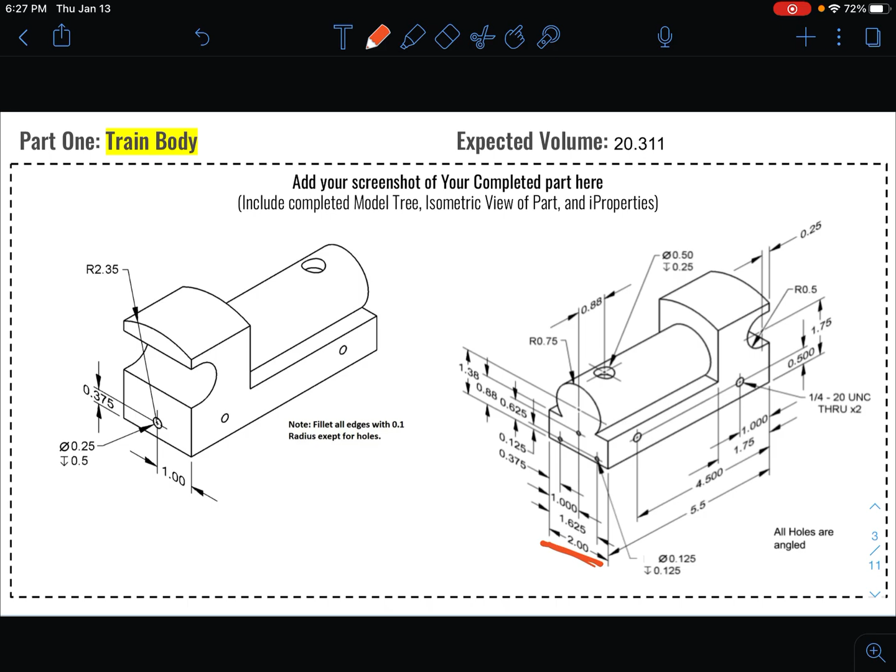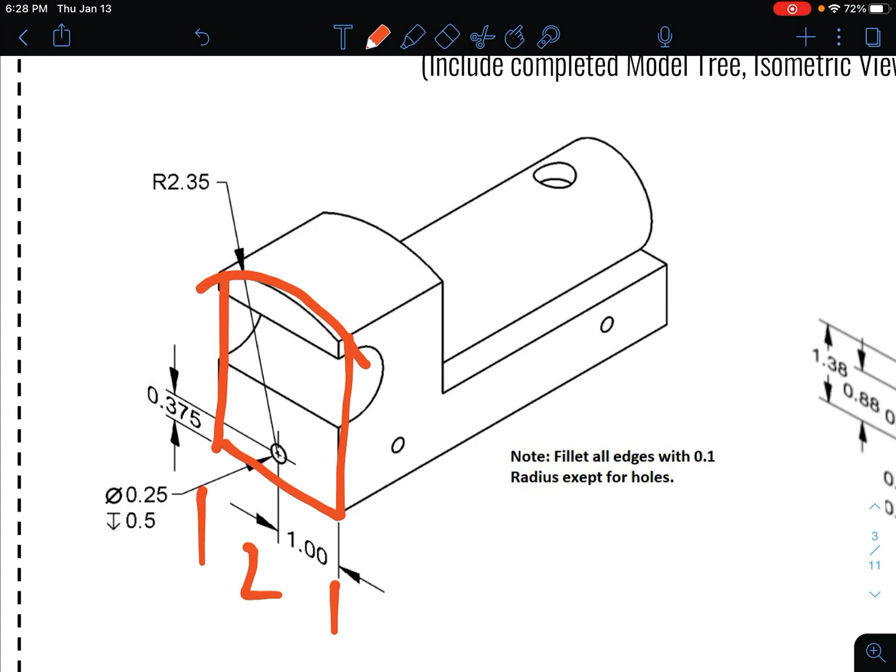So what we're going to be doing is start by modeling the back side of this train. Really what that looks like, we have a rectangle and one of the edges is this rounded radius. Now we don't know the height of the rectangle, so we're going to draw a generic rectangle with our width of 2, which I found over here. Then we'll place a circle with this radius at this point because we have those dimensions. It'll make a little more sense as we get started.

This is going to be our first video inside of Onshape. So we are going to open up OnShape and I'm going to hit the plus button to create a new document. This document I'm going to call train underscore body, and hit OK.

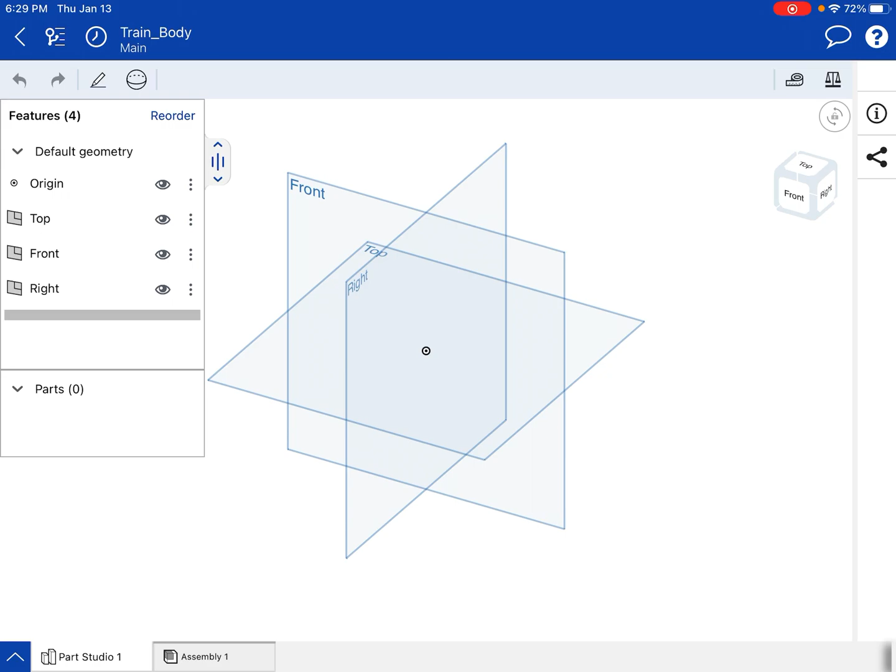Working in OnShape is very similar to Inventor. One, we draw sketches and then extrude those into 3D parts. To get started with a sketch, we're going to hit the little pencil icon in the top left, and then it's going to ask us to select a plane. We're going to start with this front plane over here.

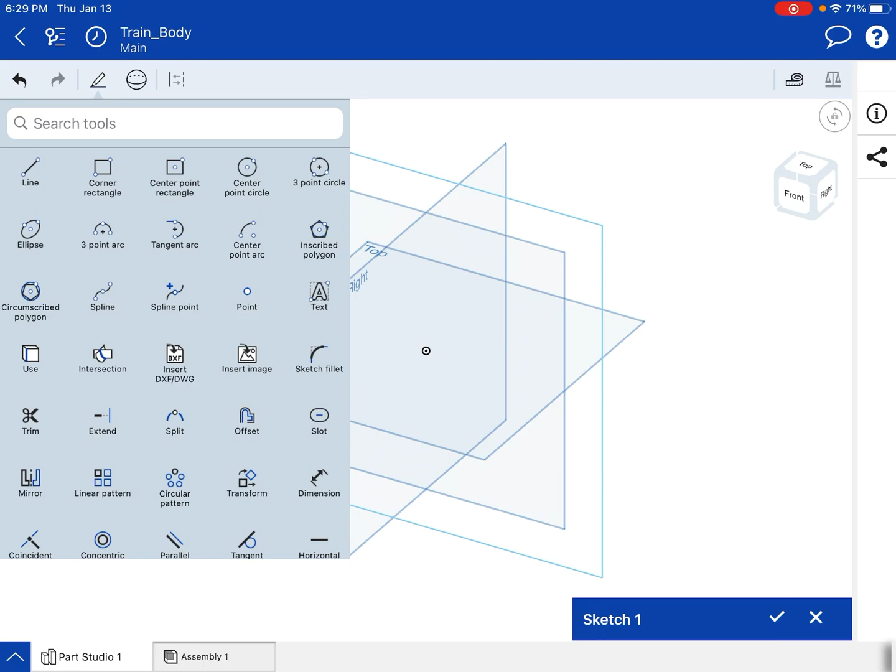One of the things that OnShape doesn't do that Inventor does is automatically shift our plane so we can see what we're working on. It's a little inconvenience, but it's easily fixed. All we have to do is a 2-finger tap on our screen and hit this bottom option, View Normal to Sketch Plane. Now we are viewing it in a normal view.

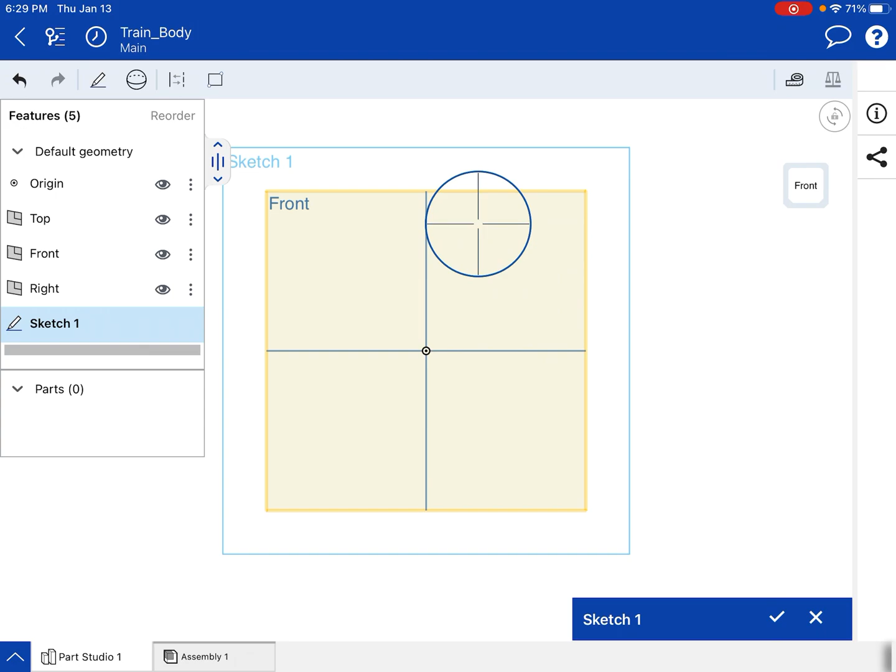Now I'm going to go over to my sketching tools. These are all my tools that I can use. I'm going to choose the corner rectangle, press and hold on my screen until I can hit the origin and then drag out the second point. I don't think I have my actual rectangle tool on. There we go. I'm going to just click and drag out a rectangle that looks something like that. You can see the black lines are fully constrained, the blue lines are not constrained.

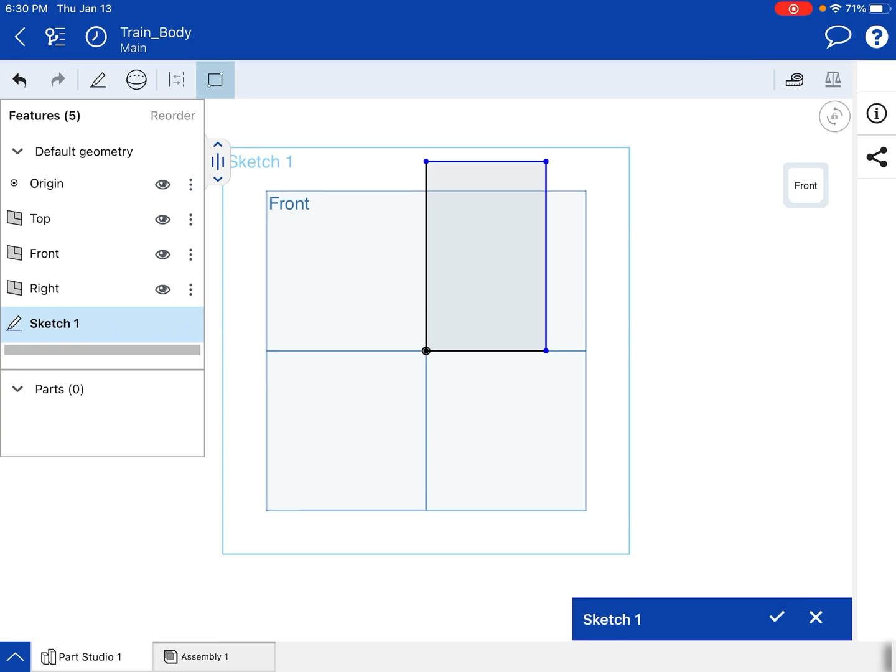Now let's go into our sketching tools again and choose our circle with a center point. I'm going to place the center in the middle of my rectangle, and place the outside edge, pressing and holding down to get a circle right around there. Doesn't have to be perfect because we're going to start throwing in some dimensions now. That's all that we needed to do.

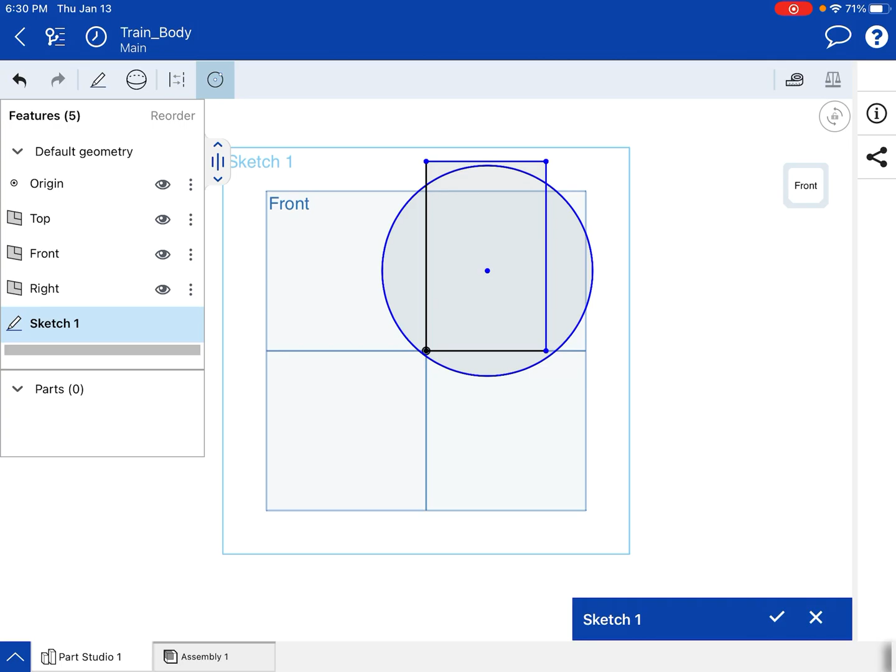The first thing we're going to do is dimension the width of our rectangle. So we have to scroll all the way down and look for dimension on the side. Choose dimension, let's throw in the width. We're going to select both of those, then tap once on our screen, press 2, and hit the check mark. Now we want to dimension our circle.

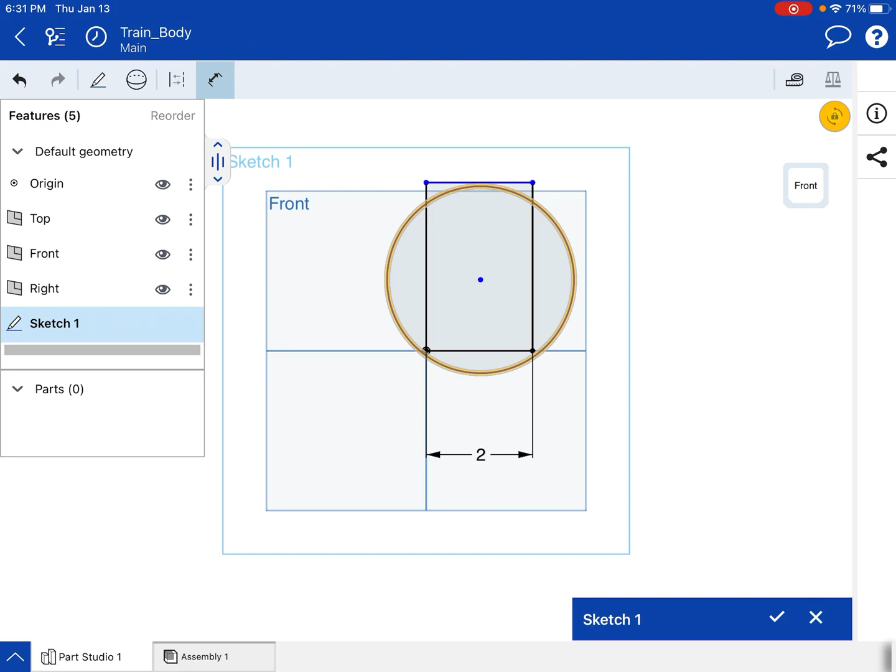Remember, circles always have 3 dimensions. We have our total diameter, which this one is, 2.35 in radius or 4.7 in diameter.

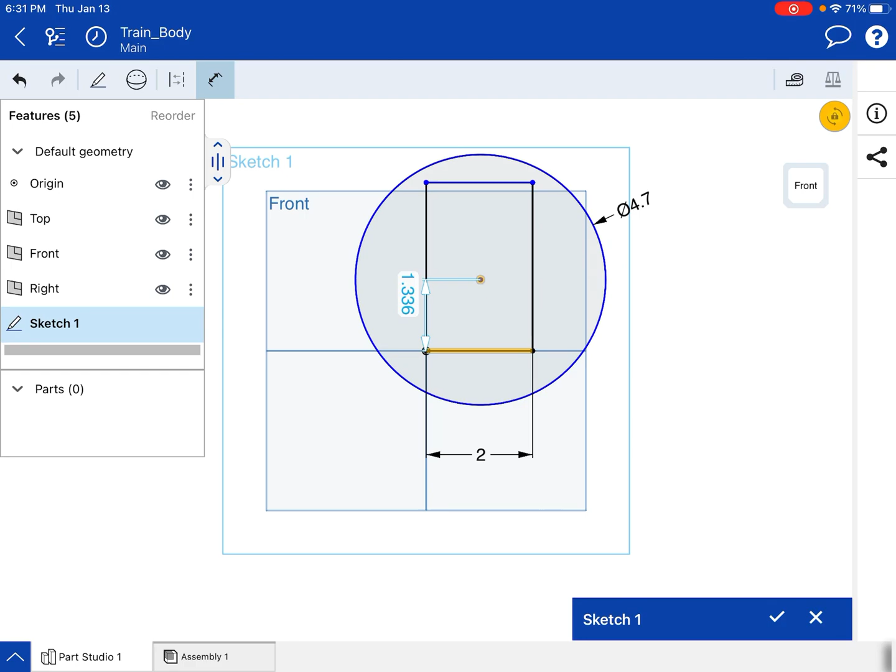Then what we're going to do is place this circle where it needs to go. So from our bottom edge of our rectangle to the center of the circle, that is a distance of 0.375. Then from the center of the circle to an outside edge, we want this directly centered, so we're going to put it at a distance of 1. We now have our basic shape.

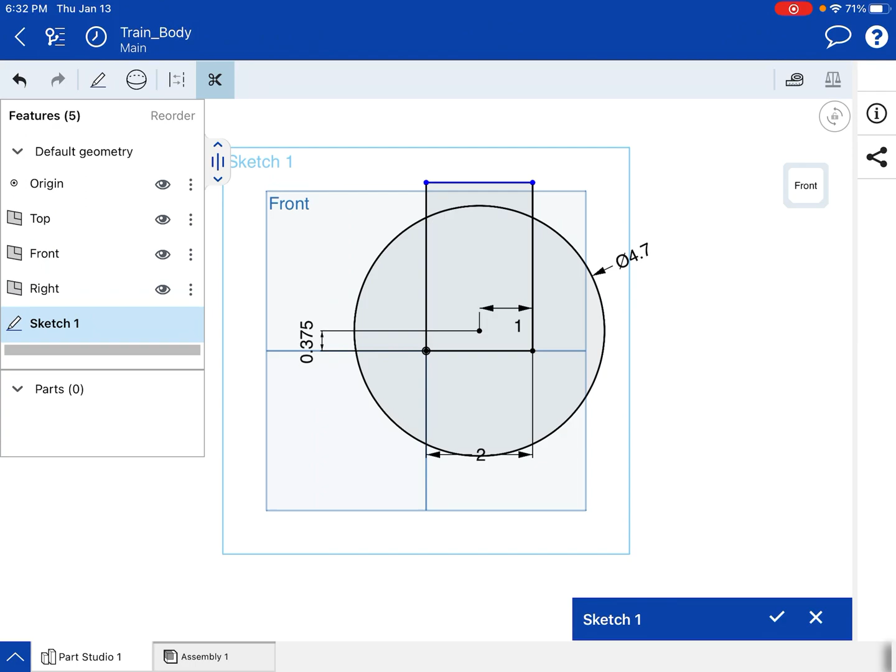The only thing that's left to do is go and trim everything. So we go back into our sketching tools, find the trim command, select that, and just tap on the lines that we do not want, and those will be removed. Now it does get rid of some of our dimensions and we lose some constraints. We can go back and throw in those dimensions if we really want, but for the sake of time, I'm going to keep on going.

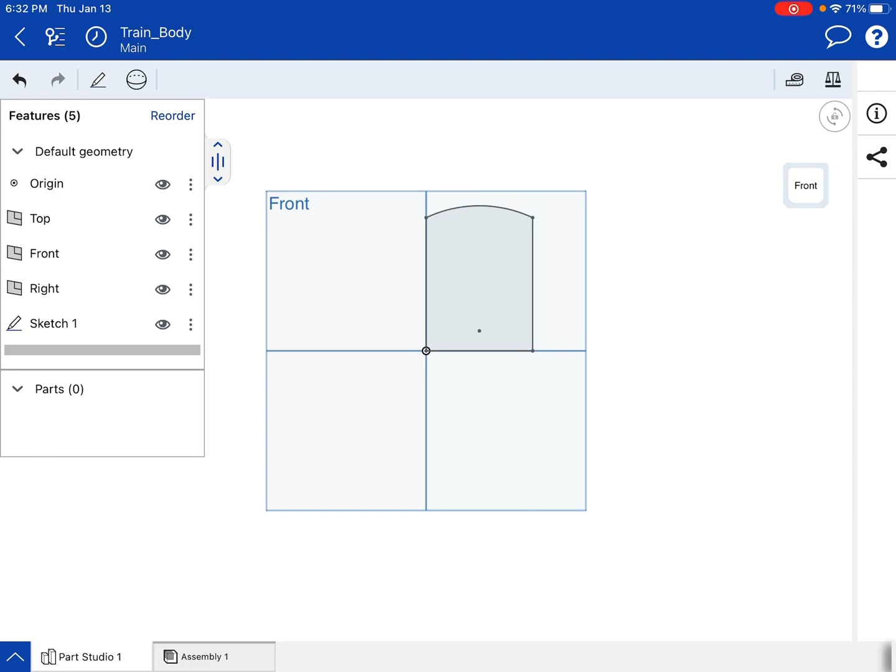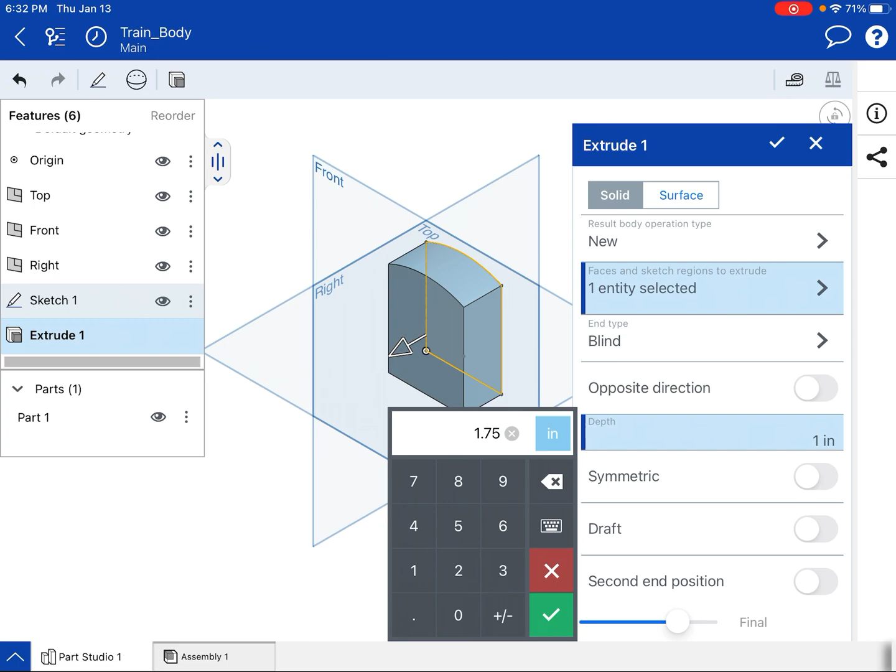I'm going to hit the check at the bottom of my page saying that I'm done with the sketch. I'm going to 2-finger touch so I can view isometric. Then I'm going to go to that sphere icon, click on that, and this all has my 3D commands. I'm going to choose extrude, and select the face that I want to extrude. Now the depth that we're extruding this is 1.75. I'm going to hit the check and hit the check up top.

And now we've got the first element of our body created. To save some room on my screen, I'm going to get rid of my top, front, and right side plane visibility. I did that over on the side—you can see the little eye icons.

I'm hitting those so that they disappear, so I don't want any of those on. I'm just going to be using this as a reference as I go model.

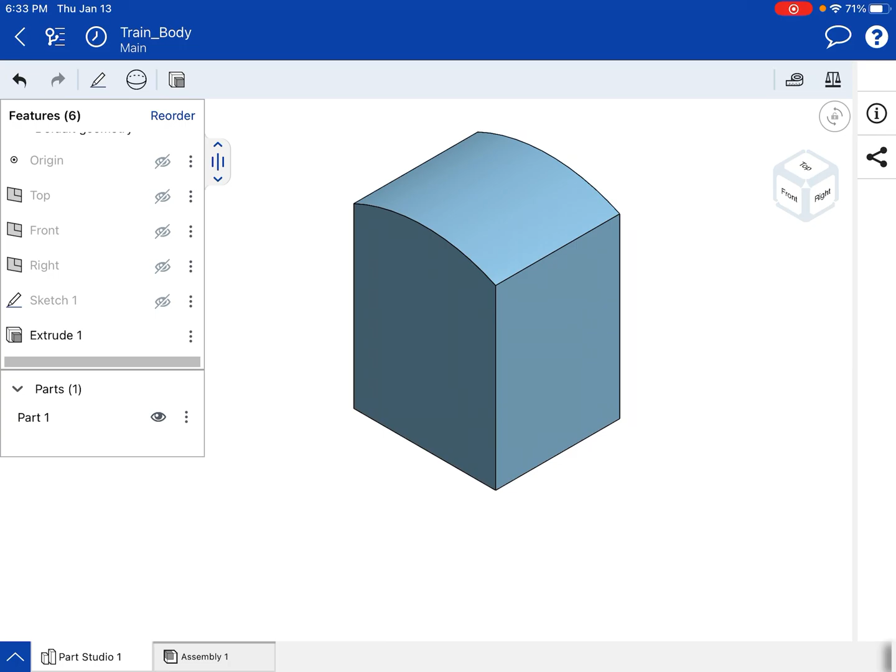So now the next thing we are going to do is model the front face of this train. We are going to draw a rectangle with a circle that cuts in between it, and extrude it out of the part that we just created. Let's go ahead and do that.

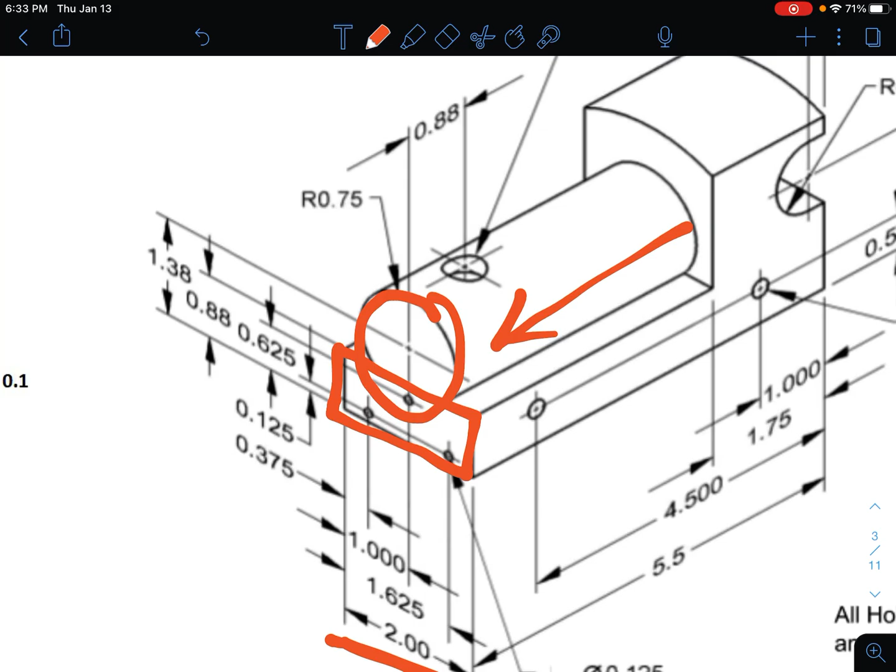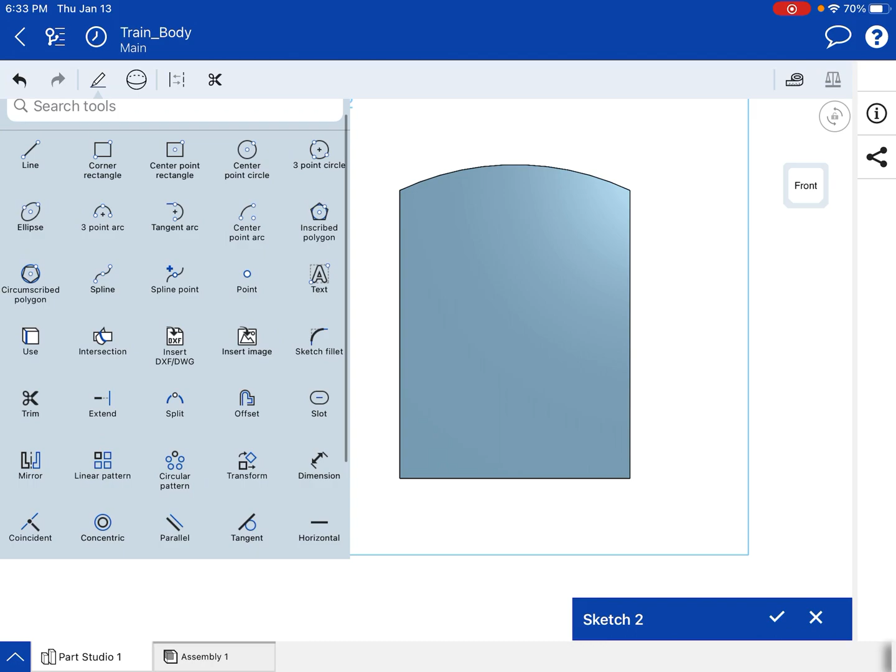In OnShape, I'm going to hit my pencil tool again. It's going to ask where I want to start my sketch, and I'm going to choose this face over here. Again, I'm going to two-finger touch and view normal to sketch plane to make it easier to see. A command we used in Inventor that we're now going to use here is this use command. In Inventor, we call it project geometry, but here we choose use, which allows us to steal sketches we've already created.

So I'm going to steal the three edges that create that U shape, and then go into my sketching tools and grab my line tool. The reason I did that is just because it saves me time - I don't have to trace those lines over and over again. You can see they're black, fully constrained, because we're stealing the dimensions from our previous sketch.

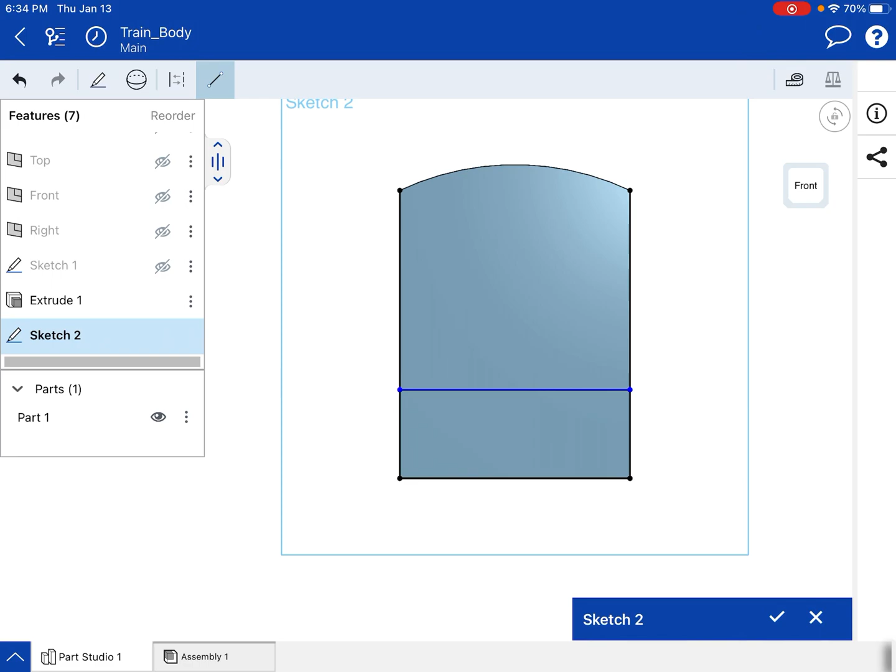I drew a line across. I did press and hold to place the first point - I find that a little more effective. It allows me to be more accurate with what I'm doing.

Next thing I'm going to do is go back into the sketch, grab my circle, press and hold, press once, press and hold to drag out the other part of the circle. Now I can dimension this.

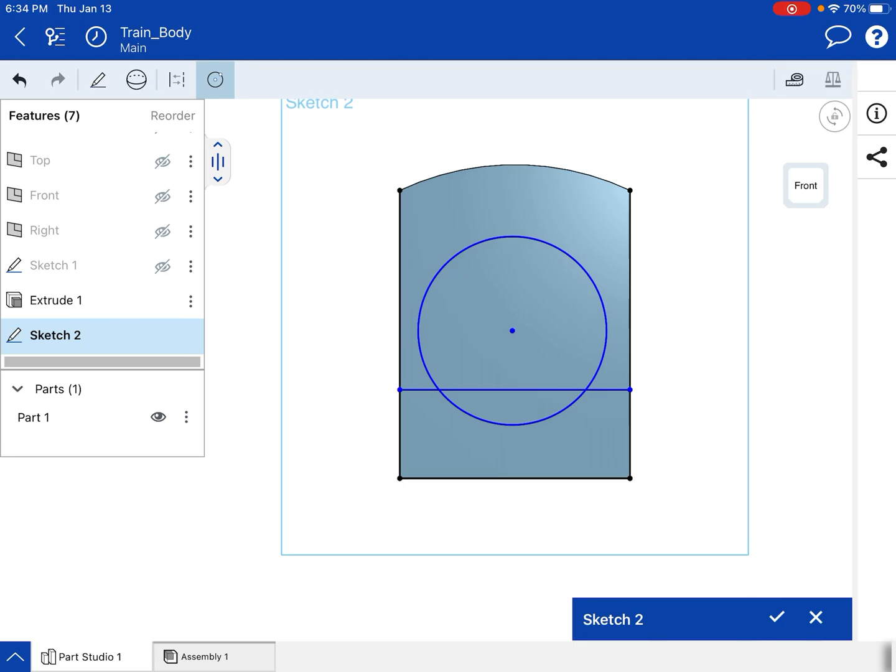Go back into my sketching tools, find dimension, and dimension the height of my line over here - this is 0.88. Then dimension the size of my circle - that circle should have a dimension of 1.5. It's a radius doubled, but you can find that in the schematic.

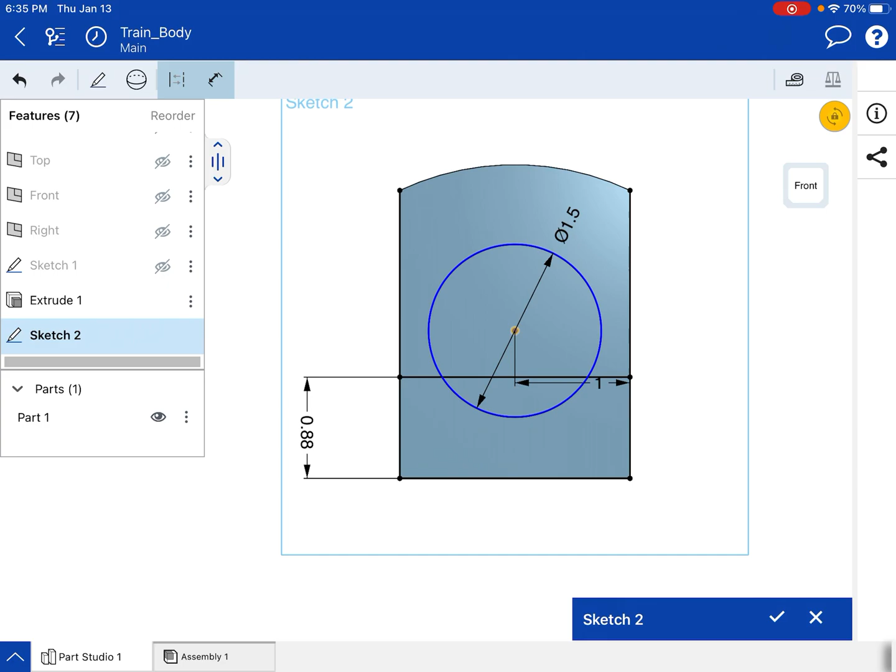And we can go from center to outside edge - that's a dimension of 1. I'm pressing on the two locations I want to dimension between, then pressing one more time to lock in the dimension. This dimension is 1.38.

Again, I am going to go find my trim tool and get rid of the lines that I do not need. And we are all good. We're going to hit check, view isometric.

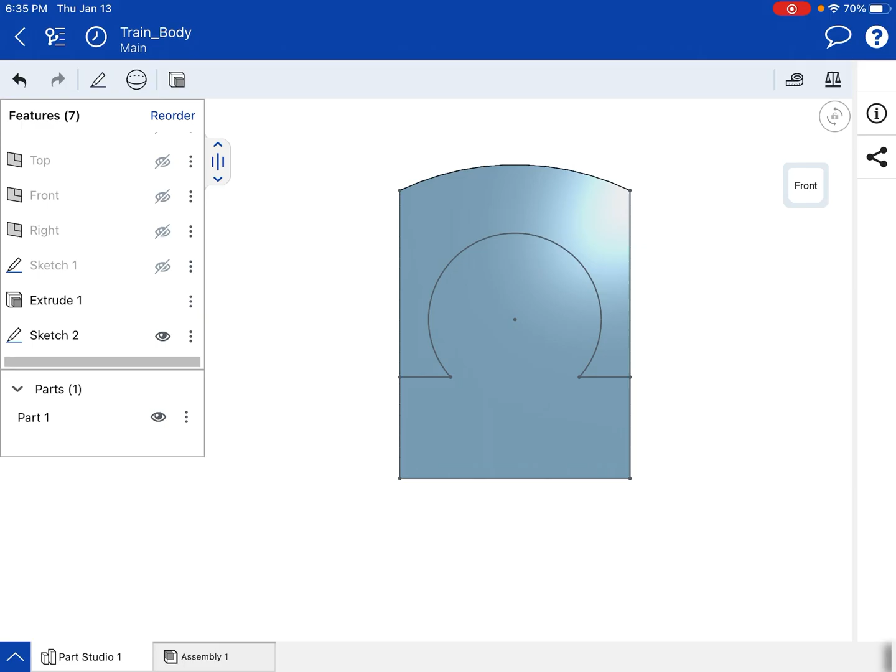So now when I go to extrude, I can extrude this out a total depth of 1.375. Did a little quick math to find that answer.

Now the next thing we are going to do is create the train window on the back face. So we're going to create that over in this area. Let's take a look at the dimensions on our schematic.

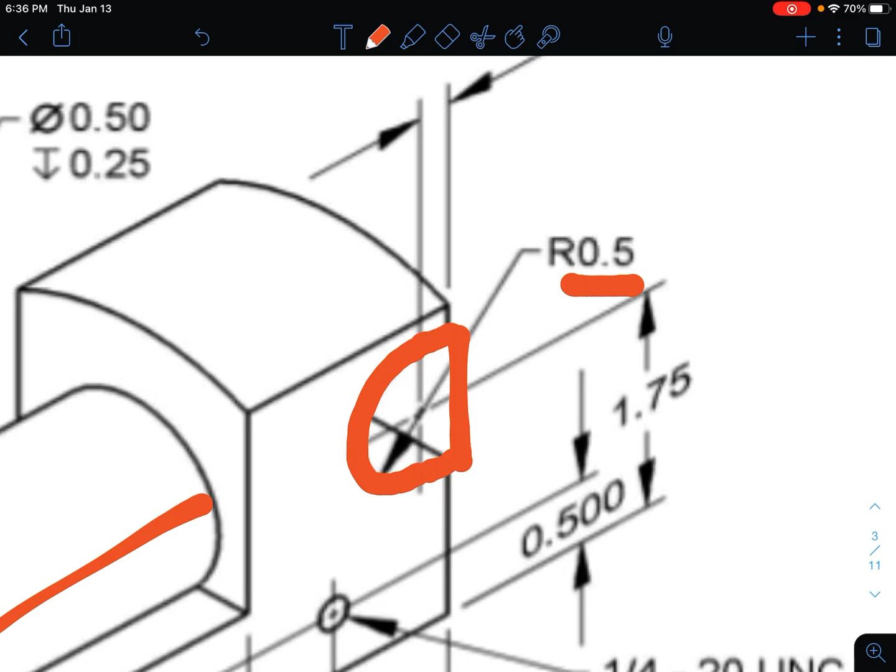On our schematic, we have a circle with a radius over here, and that has a radius of 0.5. It does have these little edges that extend past it, so it's really like a backwards capitalized D. So we're going to have a flipped capital D over there.

The distance of those edges is 0.25, and then the height of our circle feature is going to be 1.75, or not necessarily its height, but its Y location. So let's draw that in inside of Onshape. I recently opened train body.

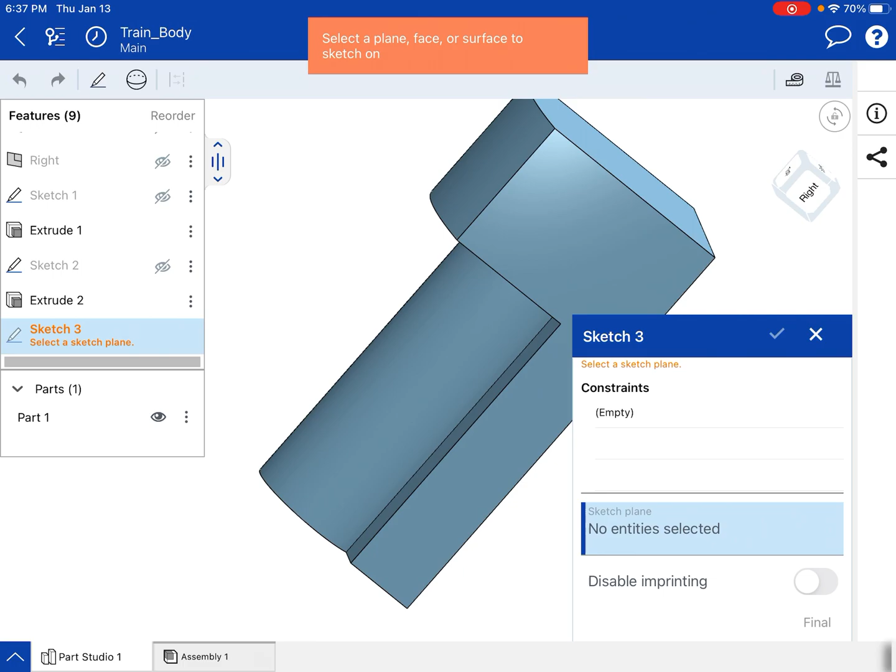There we go. So now let's go and hit our sketching command. We're going to choose this face on the outside over here and view normal to plane. I might want to rotate it around just a little bit. There we go. Now let's get started sketching on this plane.

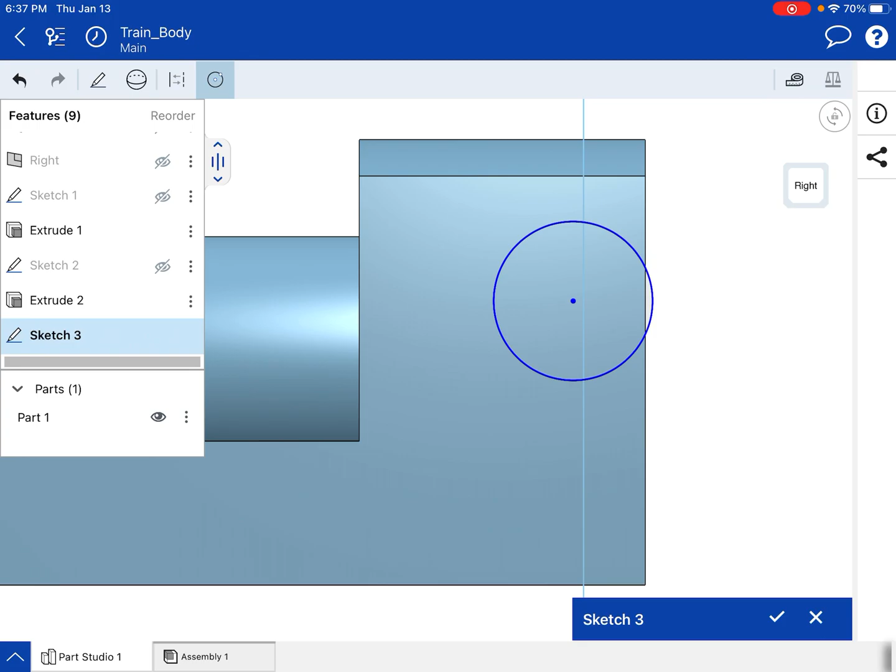We're going to grab our circle command, and I am going to just draw a circle. This circle, we're going to immediately go into dimensioning it. So its distance from this bottom edge over here is 1.75. Then its distance from this back edge over here is a distance of 0.25. The diameter of the circle is 1.

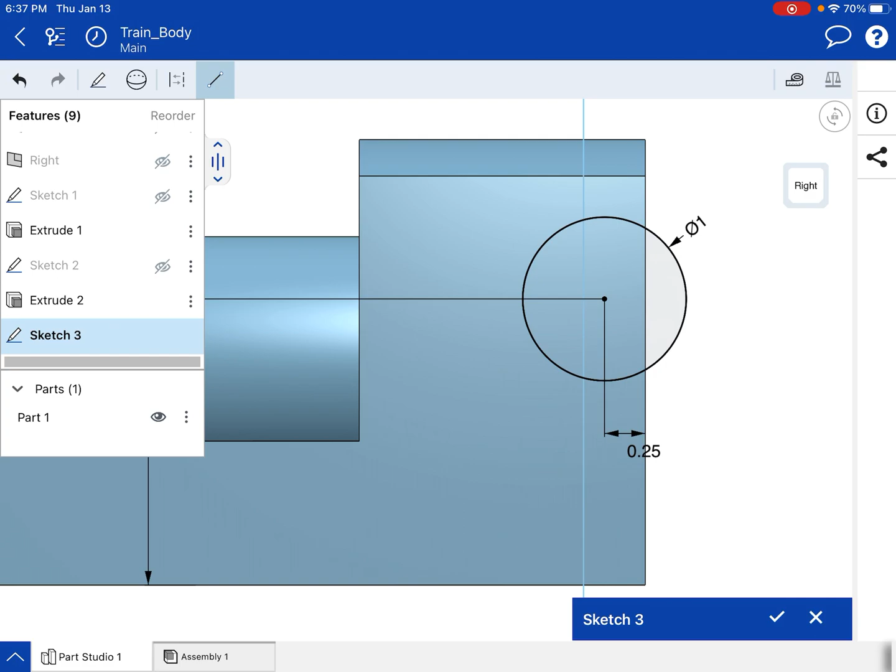And now I just need to grab some lines, and I'm going to be drawing from the top corner of my circle out to this edge over here. I am going to not do that - I'm going to grab my line tool again and do the same thing at the bottom.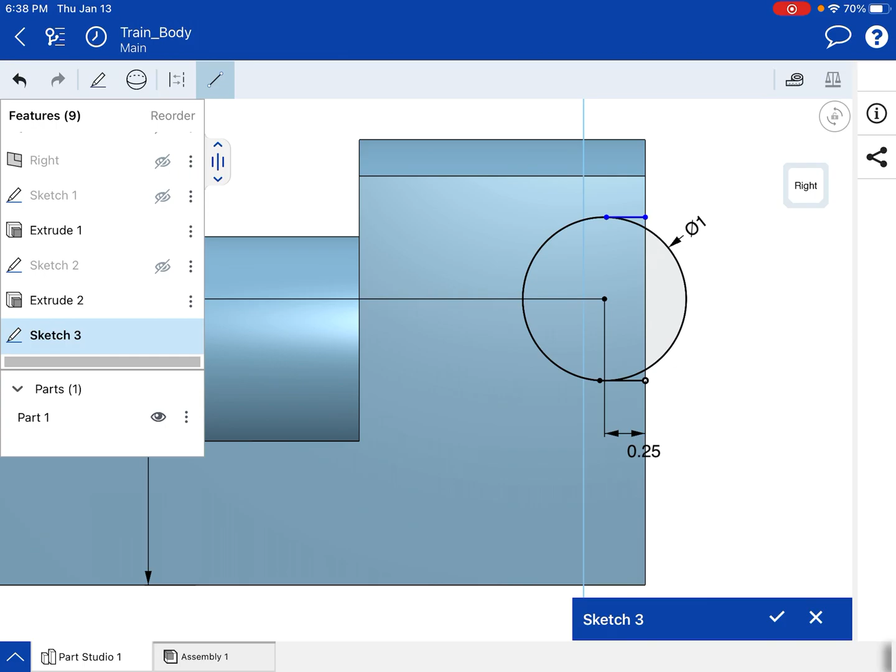The bottom is perfectly aligned where that is the midpoint, but the top one is blue - that means we still need a constraint on it. So we are going to grab our tangent constraint. With OnShape, you want to grab the items you want first and then hit the constraint. So we select both things we want, then hit the constraint, and we're good to go.

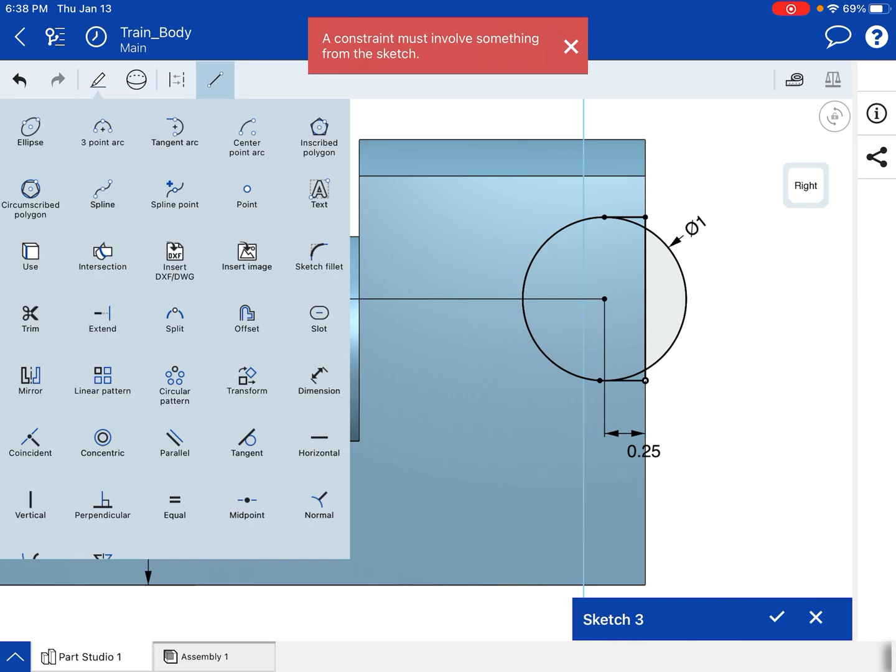I'm going to draw one last line that connects my two lines over here, and then I'm going to grab my trim tool and get out the parts that I don't want.

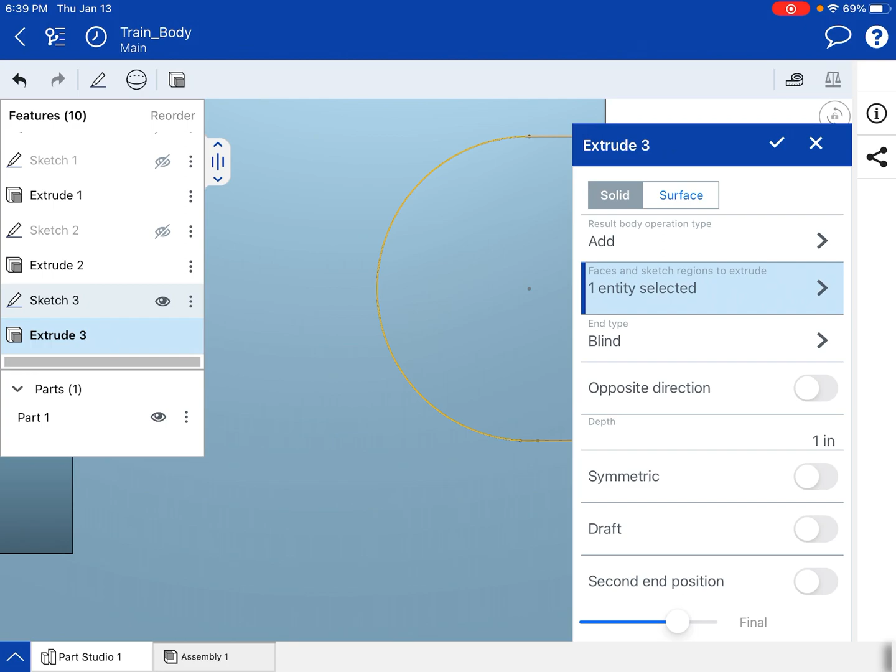Zooming in over here, I'm going to remove that, and that, and that. Perfect. Hit the check mark, go over to our 3D tools, and extrude that face.

This time we want to change our add option to remove, because we're subtracting out. I'm also going to do a 2-finger touch. Oh, I can't view it right now. I'm going to move my extrude menu down and go to my isometric view so I can see how far I'm extruding back.

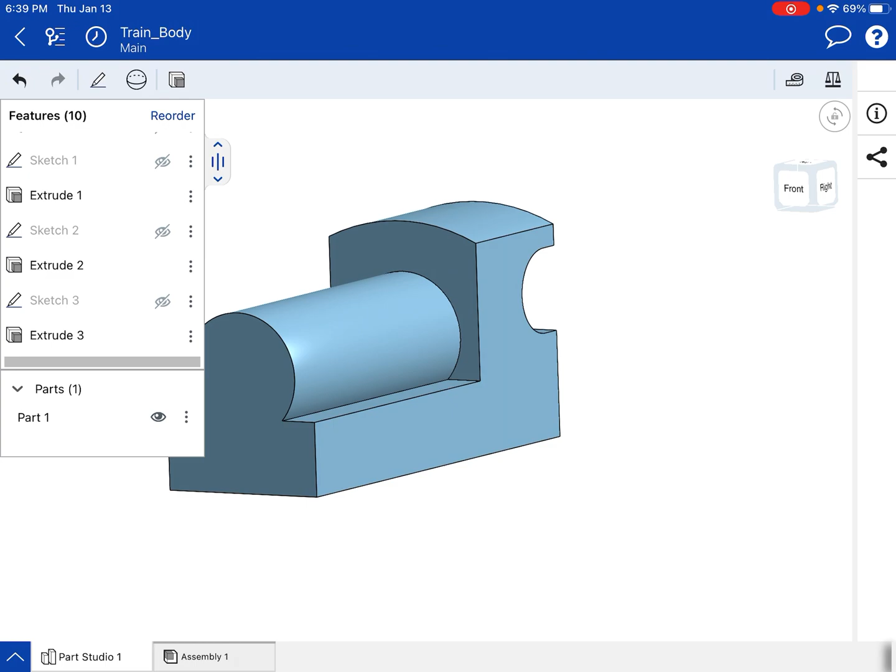I'm going to extrude all the way through the object and hit my check mark. So now we are doing pretty good. It is looking close to where we want to be, but little smaller features are coming up, so we're going to go isometric.

Now, the most challenging part about doing this in OnShape is that creating this whole feature takes one extra step than it would inside of Inventor. What we're going to have to do first is draw a line across here so that we can project a plane across, and I'll show you what I mean by that and why we're doing it that way.

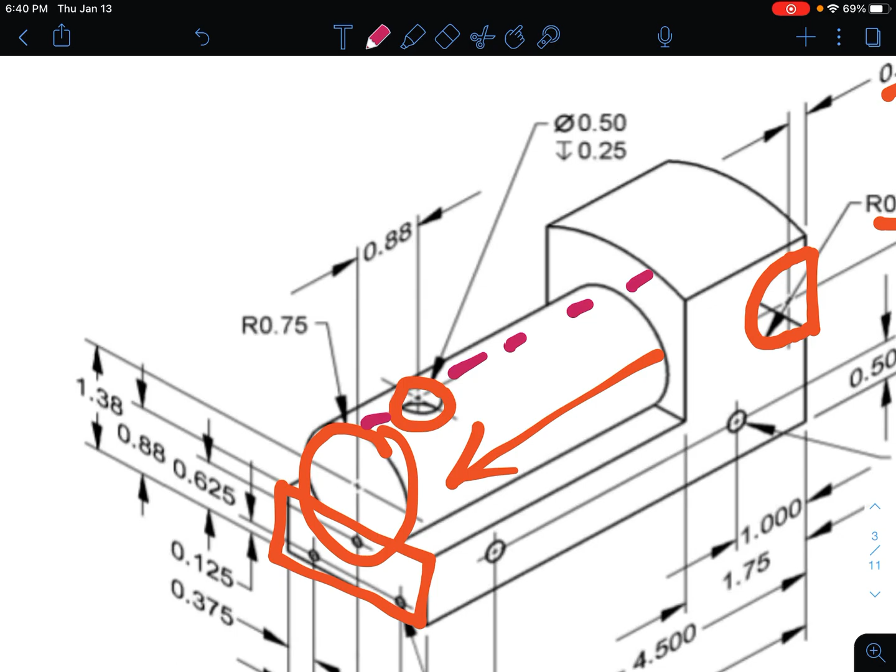The first thing we're going to do is start two different sketches. The first sketch is on this front face over here, and I am going to grab my point tool. It's right over here, and it allows me to place a point anywhere on my sketch. I'm just going to place a single point right there. It has no width, depth, or height—it's just a single point, the smallest object we can make. I'm going to hit the check.

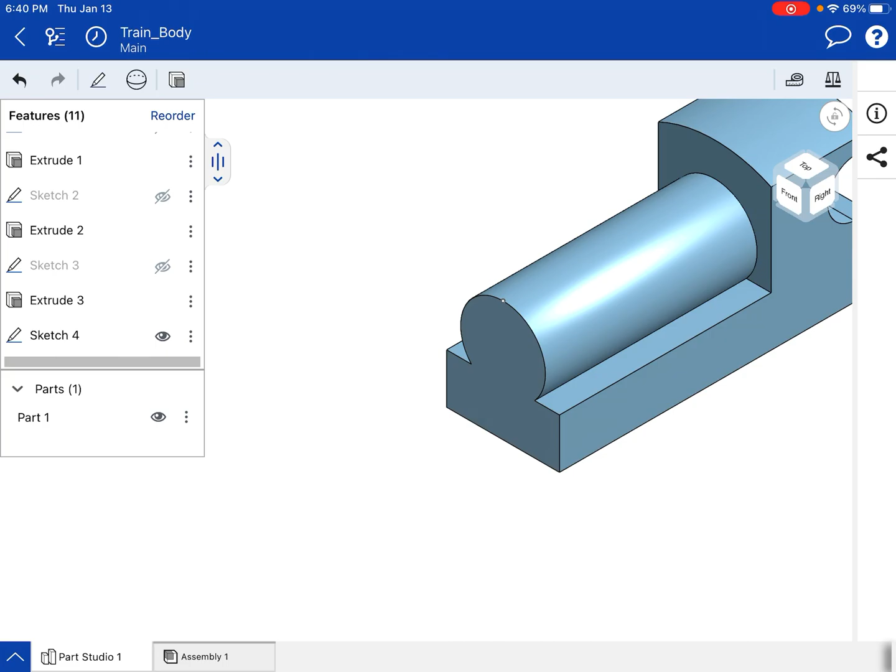I'm going to do the same thing, making another sketch on this face over here. Sorry, I did not press and hold long enough. This face over here—I'm going to grab my point tool and go until it snaps to that top position. Now I have a point at each end over there, and I'm going to hit the check that I've finished with that sketch as well.

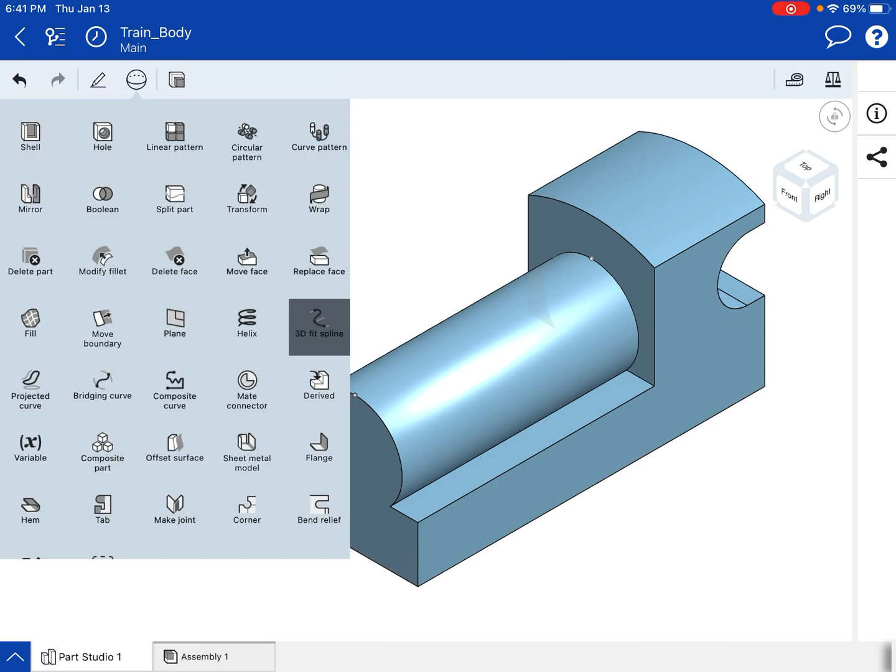The next thing I'm going to do is go into my 3D model tools, not my sketching tools, and add a 3D fit spline. This is the only way we can add a line in 3D, so I'm going to go from this point to this point and make a line straight across.

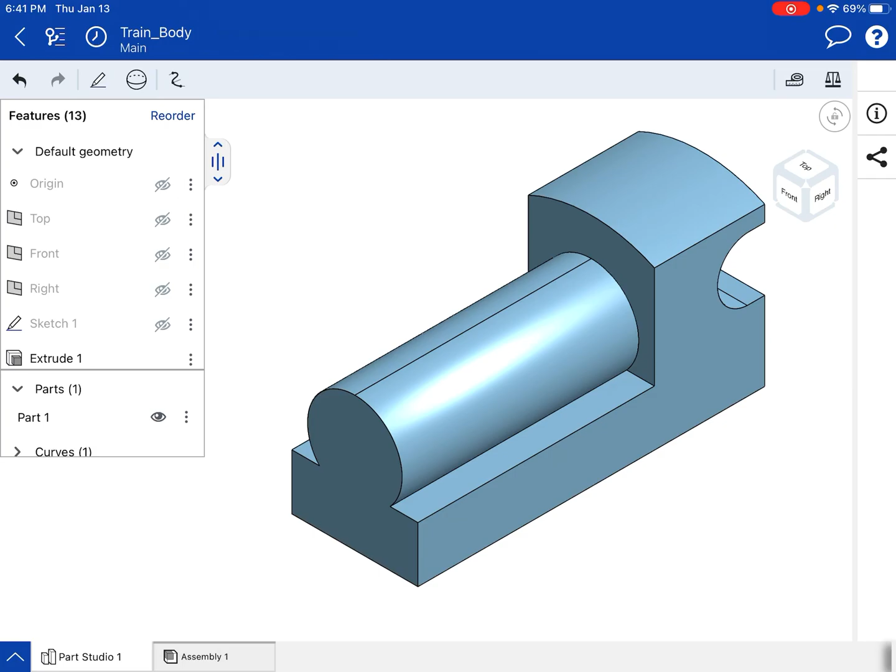The reason why we did that is because we want to add a plane. When we started drawing, our top, front, and right side planes are our origin planes. We can add a construction plane that allows us to draw on it so that we can actually make the shape that we want. We wanted to add a hole feature on top of this engine body, but if I hit my sketch command, I can't choose to sketch on this rounded face. I have to have a flat face to draw on.

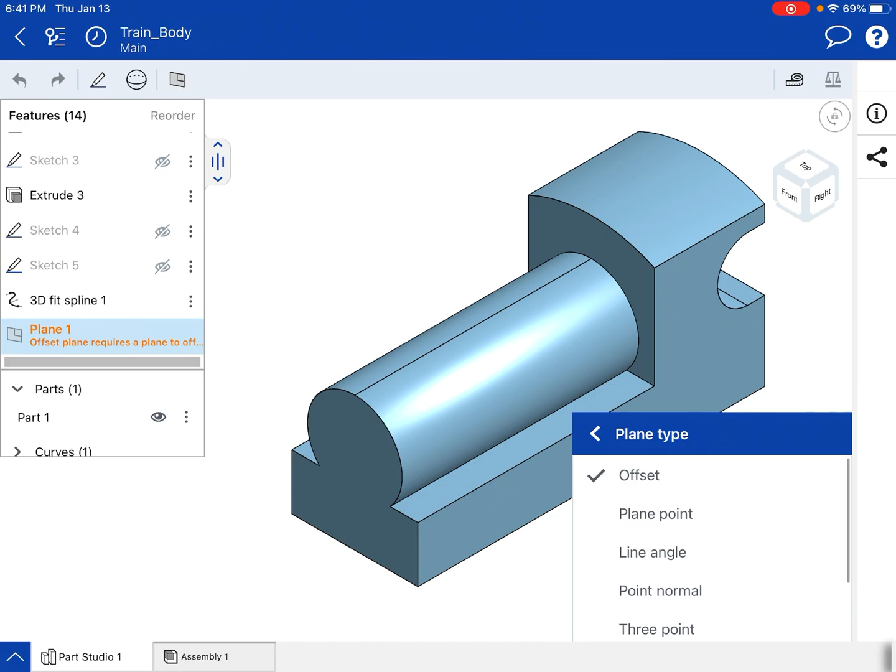So what I'm going to do is go to my 3D commands again and choose plane. We don't want a plane type offset, we want a plane type line angle. We are going to select that line that we just created, and we are going to keep our angle at 0 degrees. When we hit check, we now have this plane that we can sketch on.

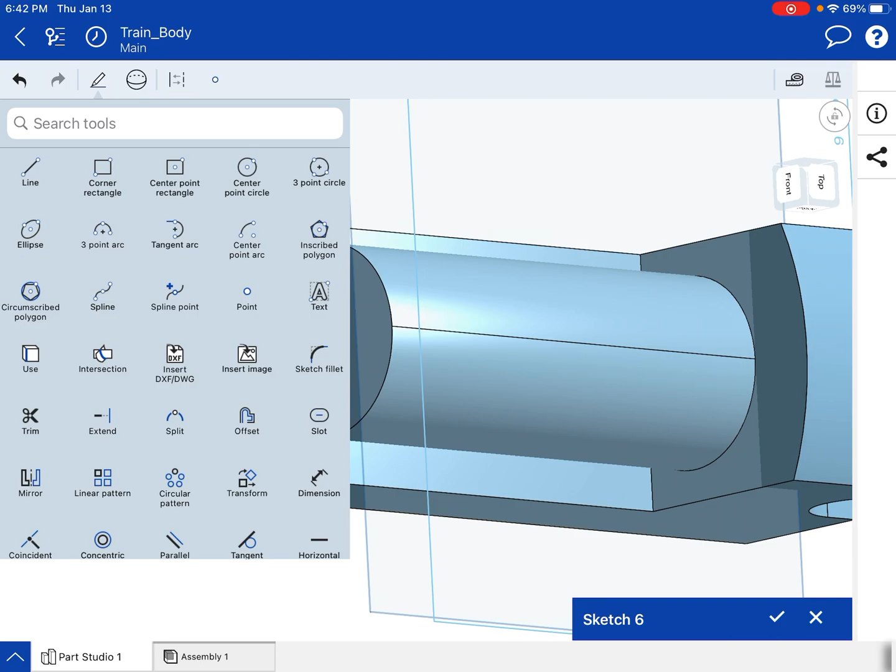So I'm going to grab my sketch tool and select this plane over here. With that plane selected, I'm going to view normal to sketch plane, and I'm going to draw in that feature that I want. That feature is a circle with a center point, which I'm going to place along that line we created and draw out.

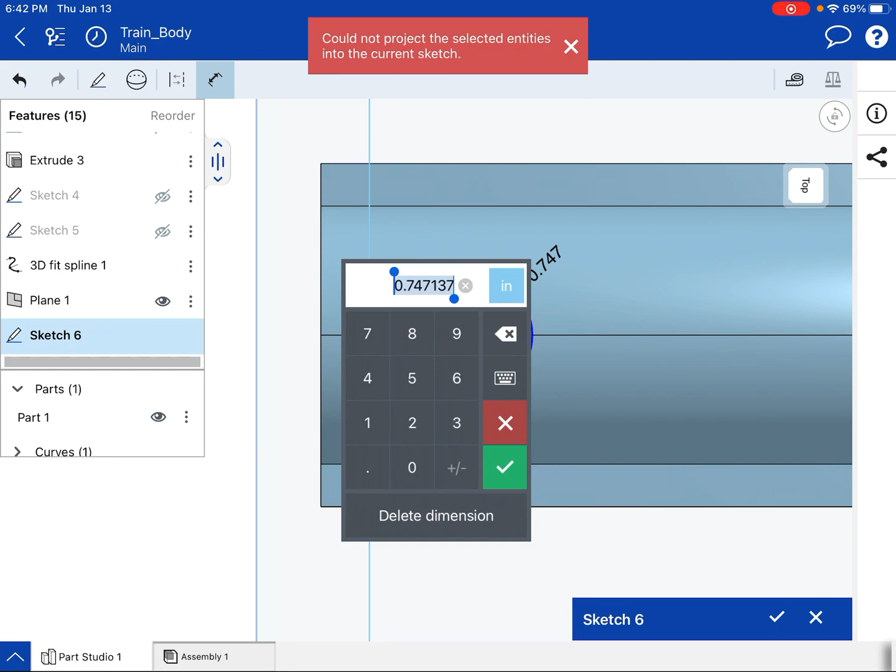I'm going to throw in a dimension for the circle size—that circle size is 0.5—and then throw in its location. So from the center of the circle to this edge over here, that's 0.88. It already has its height constraint because we had grabbed that from the line that we drew across. I'm going to hit the check.

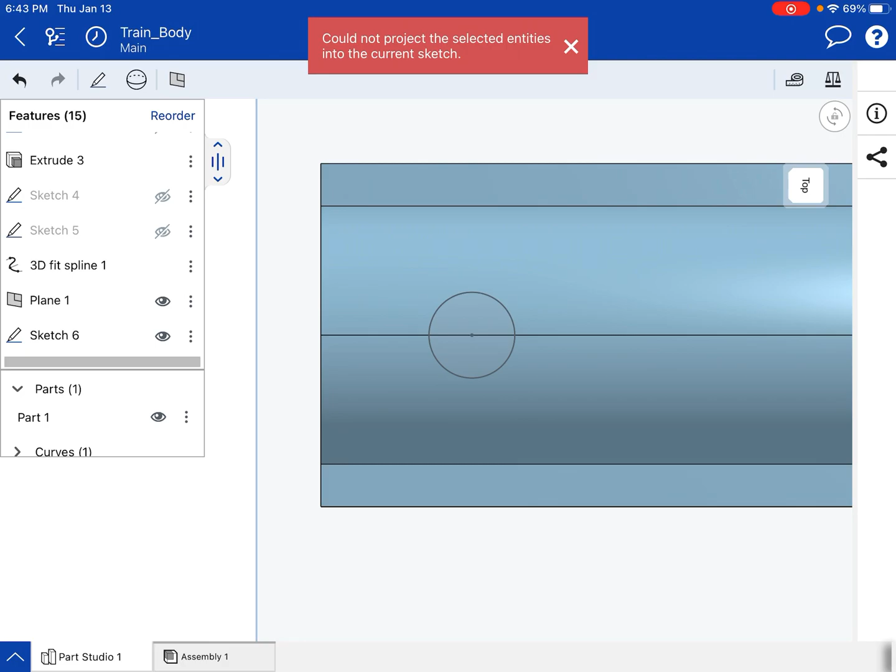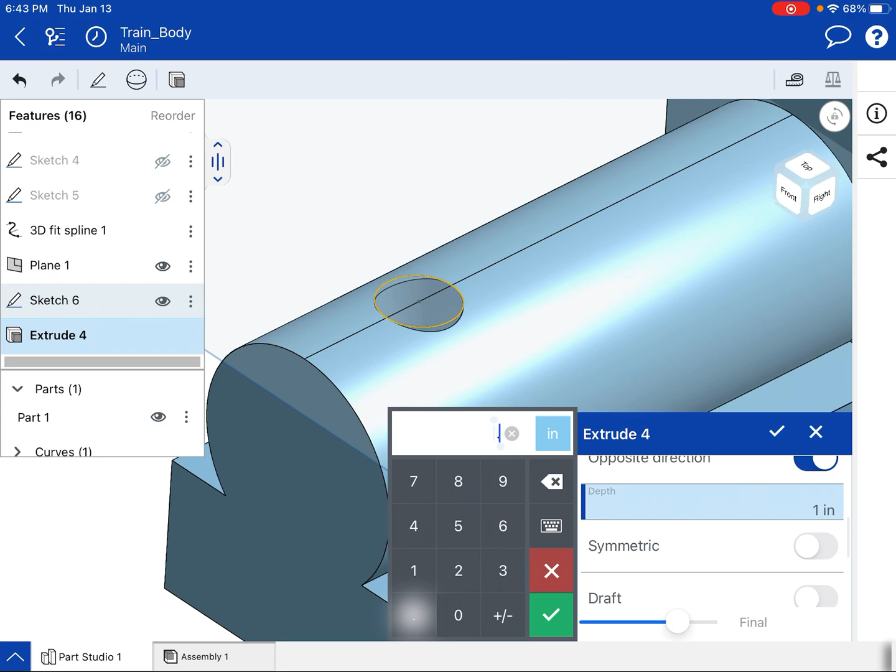I'm going to view isometric so that I can go and extrude this out. So I'm going to extrude the circle—it wants me to choose what face. Grab the circle. I don't want to add, I want to remove, and I want it at a depth of 0.25. I'm going to hit the check, and I'm going to go over to isometric.

Now, just like the other planes, I can turn off the visibility of that. Unfortunately, we cannot turn off the visibility of that 3D spline. It's okay, we'll live with it.

Now we're close. We have 3 more sketches and 3 more extrusions that we have to do. So let's start by creating the 3 hole features that sit on this front face over here.

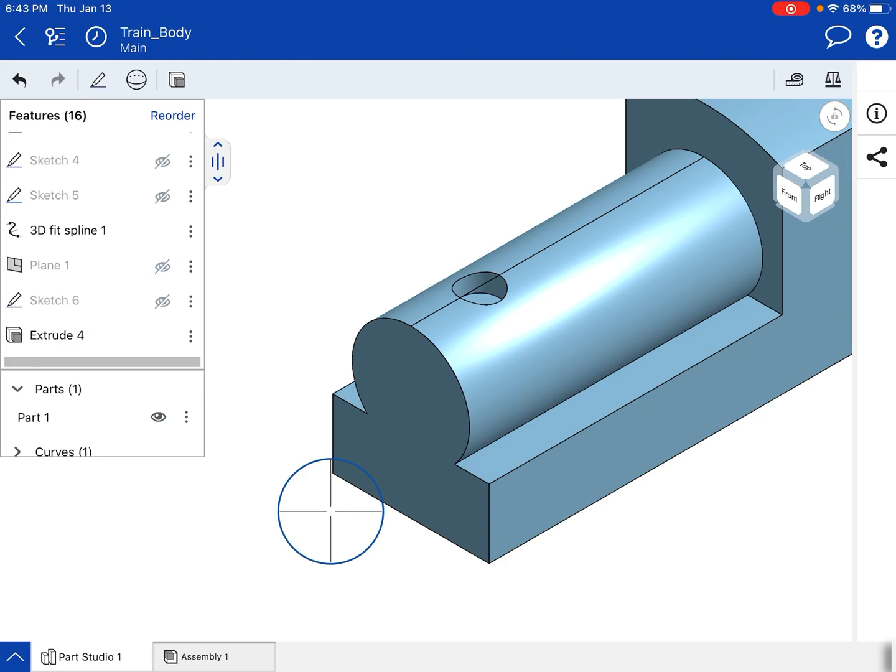So we're going to grab our sketch command. We'll start on the front face over here and view isometric. Now we are going to add a couple of hole features. I'm going to draw in 3 circles and place them right about where they need to go. Those are our 3 circles.

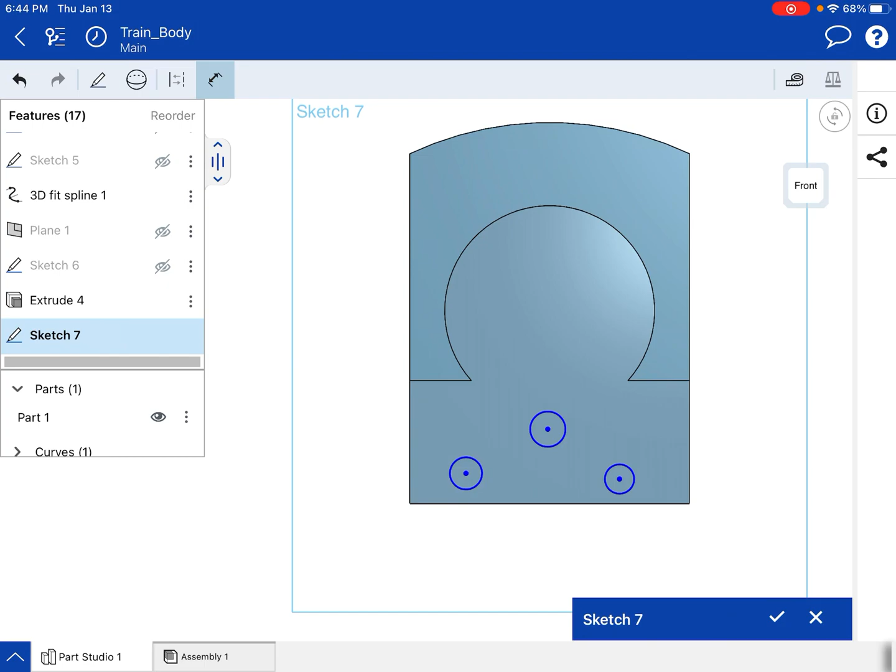I'm going to dimension all their sizes. They all have the same size, 1/8 of an inch, or 0.125. Did it dimension all of them? No, it just made them all in reference to each other. It would have been crazy if it was able to do that.

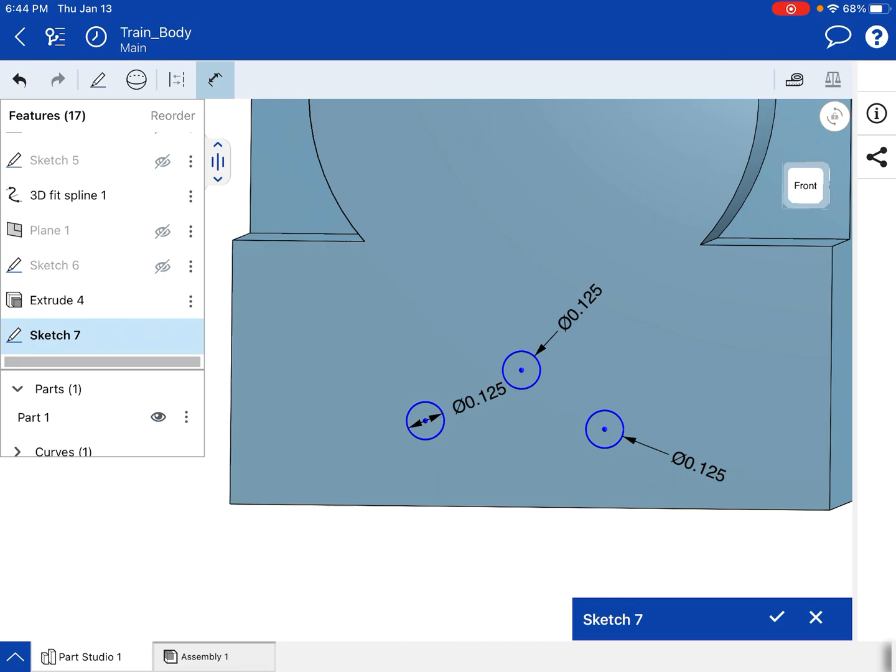I'm using that hold to grab currently because it's a little bit more difficult to get these. With my dimension tool, I'm going to dimension all of my widths. This first width over here is 0.375. The second width is from the center to this baseline again, that is 1. And the last width, or x coordinate, is 1.625.

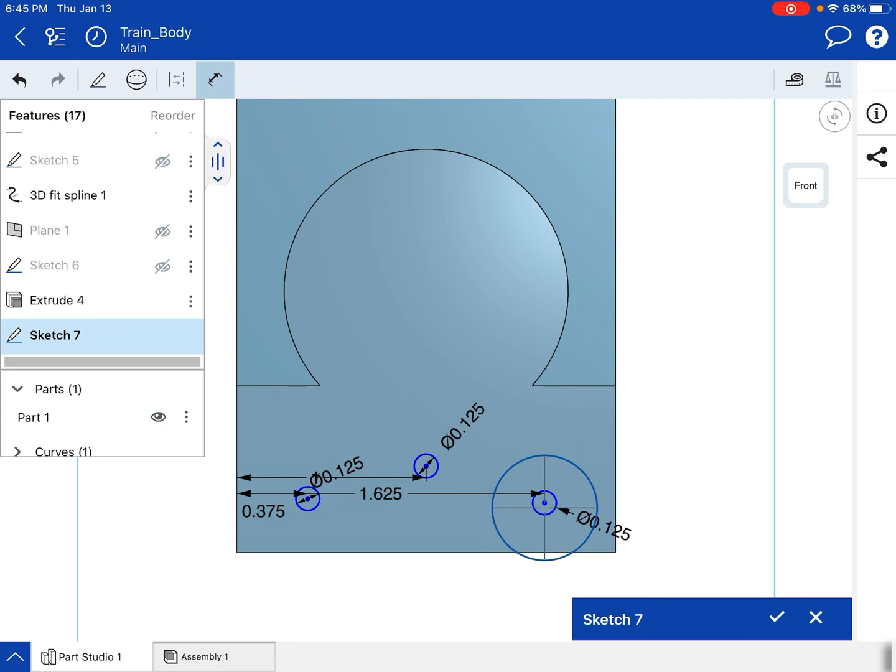Now for the heights, from here to our baseline over here, that is a distance of 0.125, and the same for the other one. The last one has a height of 0.625.

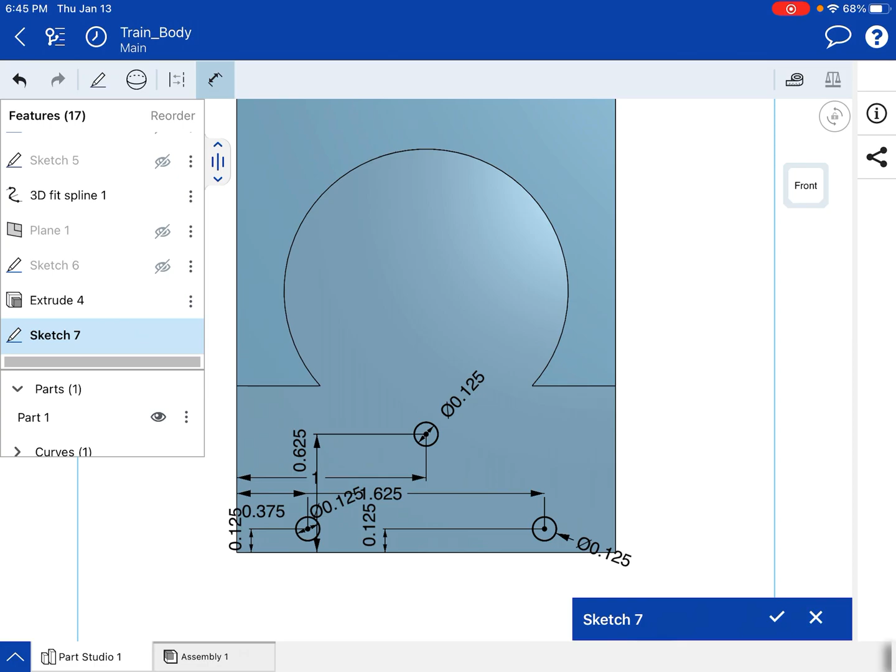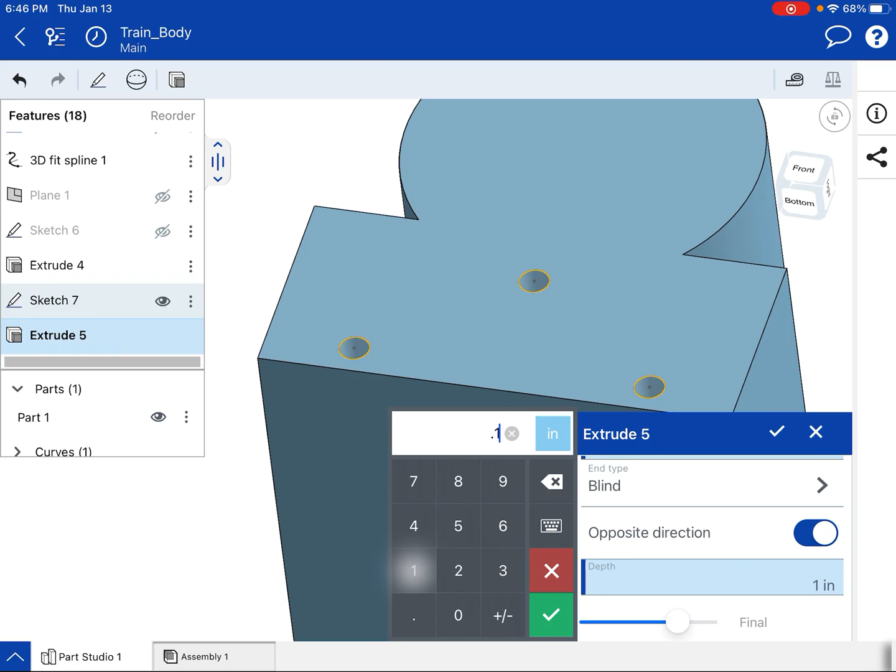Again, all these dimensions are available on our schematic. I'm going to go over to isometric view. We want to extrude each of these, so I'm going to select all of them. We're going to go over to remove, and the depth that we want is 0.125, the same size as the diameter. We now have those 3 holes extruded as well.

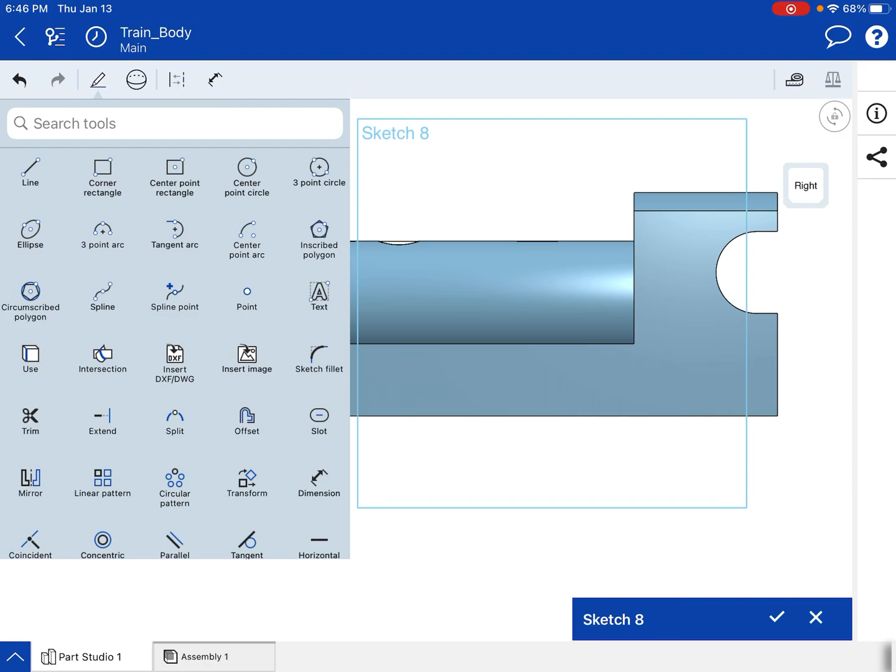There are 2 more sketches. One is on this face over here. We are going to view normal to sketch plane, and I'm going to do the same thing. I've got 2 hole features and another one over here. Careful not to have it snap to anything.

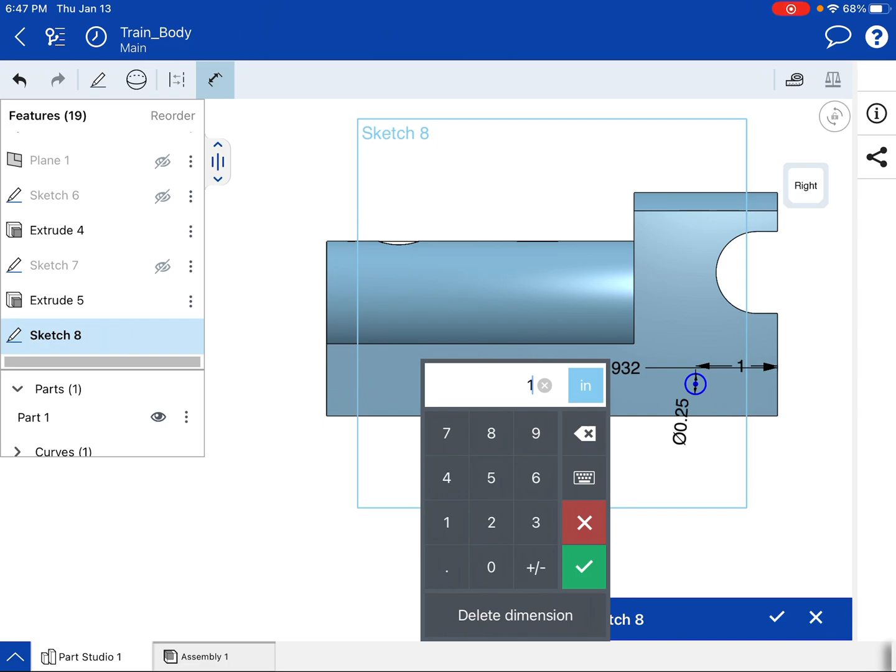Let's go in with our dimensions. The size of these holes should be 0.25, 0.25, and now for the locations. From this back edge to the first hole is a distance of 1, and from the back edge to the center of the second hole is a distance of 4.5. Both of them have the same distance from our bottom edge, which is 0.5.

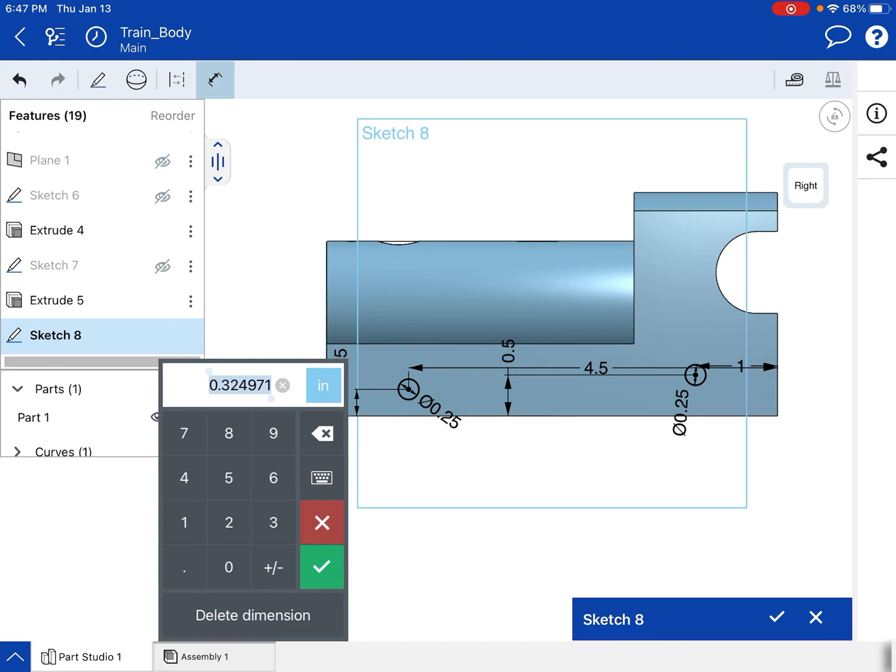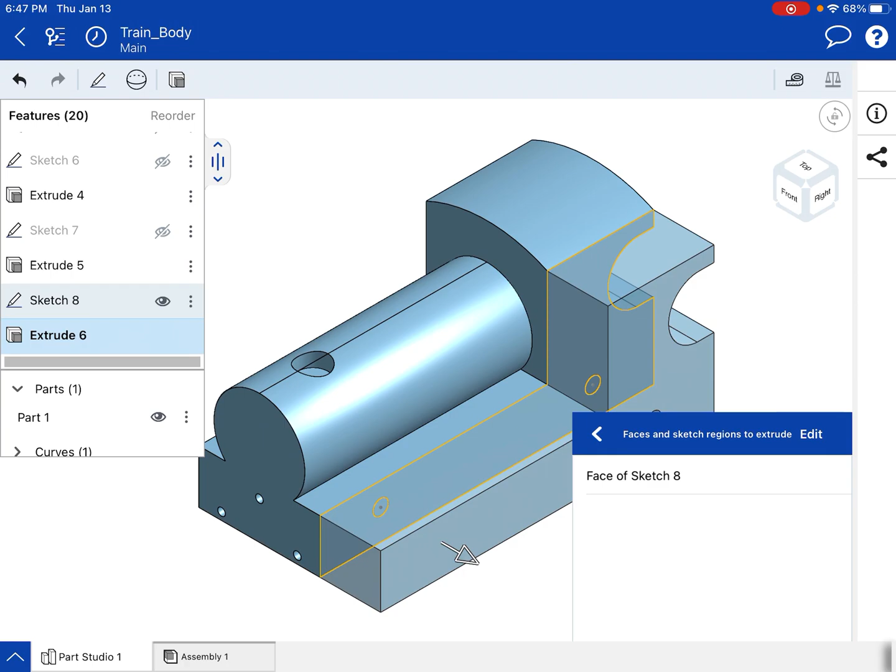I'm going to hit the check and go back to my isometric view, grab my extrusion, choose the two holes that I want. Oops, I accidentally selected something I didn't want, so I'm going to edit my selections. I believe that's the second one that I don't want. Nope, I deleted all of them.

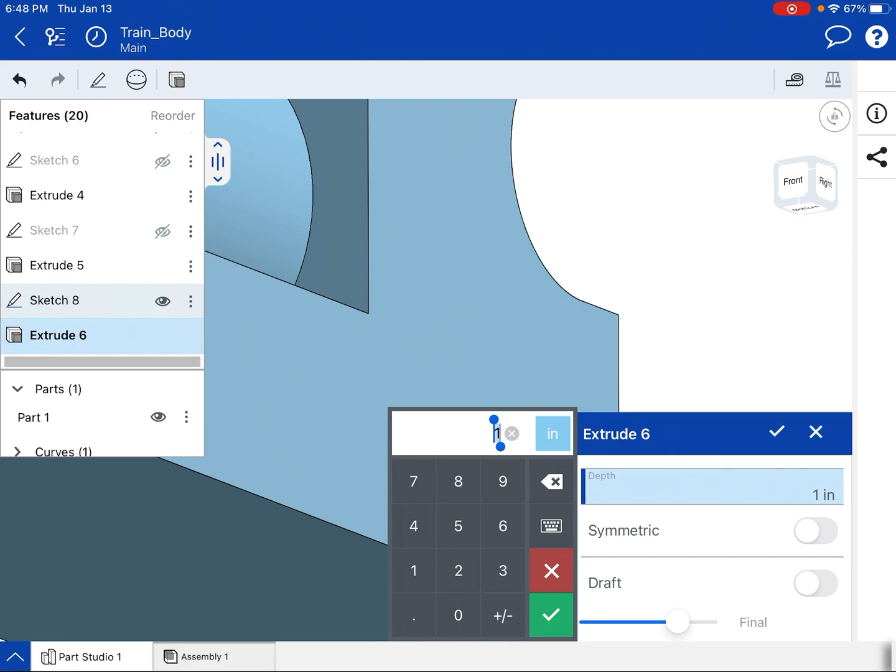Oh well, I'm going to go back in here and just zoom in to be cautious, choosing that one and that one. This time I don't want to add, I want to remove, and I want to remove a depth of 5 so it removes everything. Go back to my isometric view.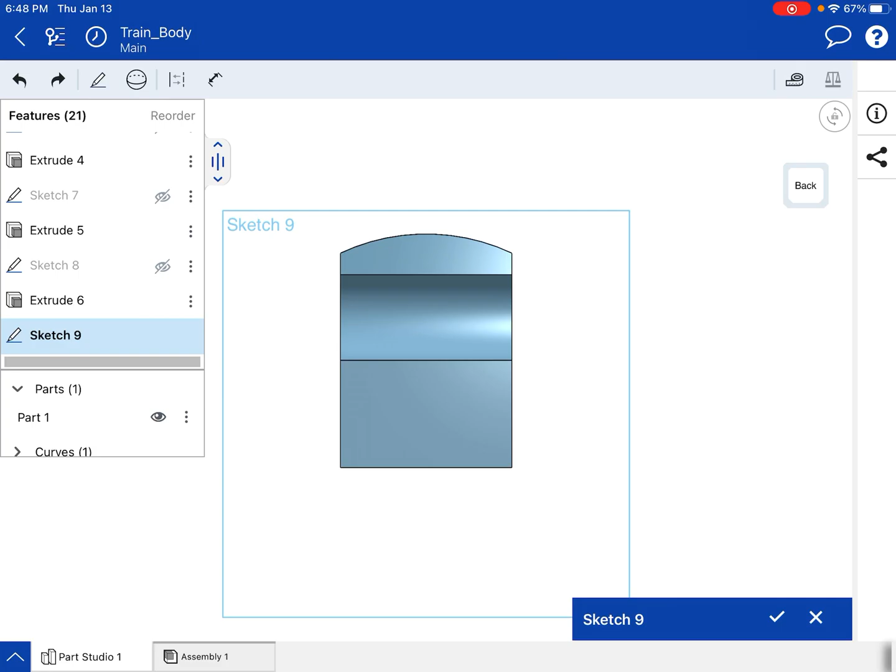Now the last feature we have is over here. We've got a hole feature on the back, so I'm going to grab my sketch tool, start on that bottom face over there, grab my circle, and we should be getting pretty comfortable with this. I'm trying to make sure it's not snapping to things, but I wasn't super fortunate in that regard, so I'm going to try and space this out right now. Oh shoot, I do have to delete it. I'm going to go back and grab my circle command, and zoom in to make sure I don't accidentally have it snapped to any points.

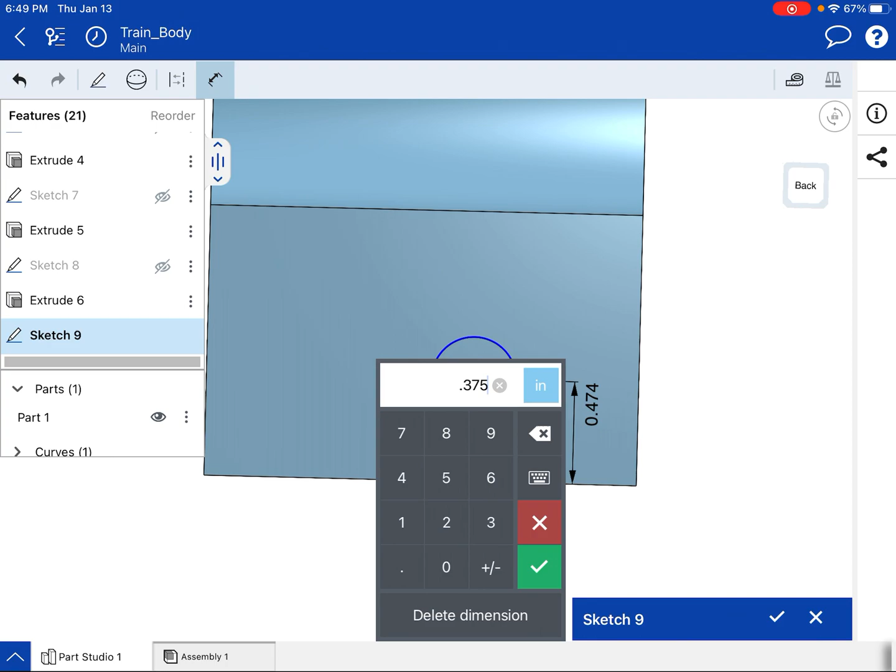Grab my dimension tool. I'm going from this point to the bottom edge, that is a distance of 0.375. Then the center of the circle to the outside edge, that is a distance of 1. And the overall size of the hole is 0.25.

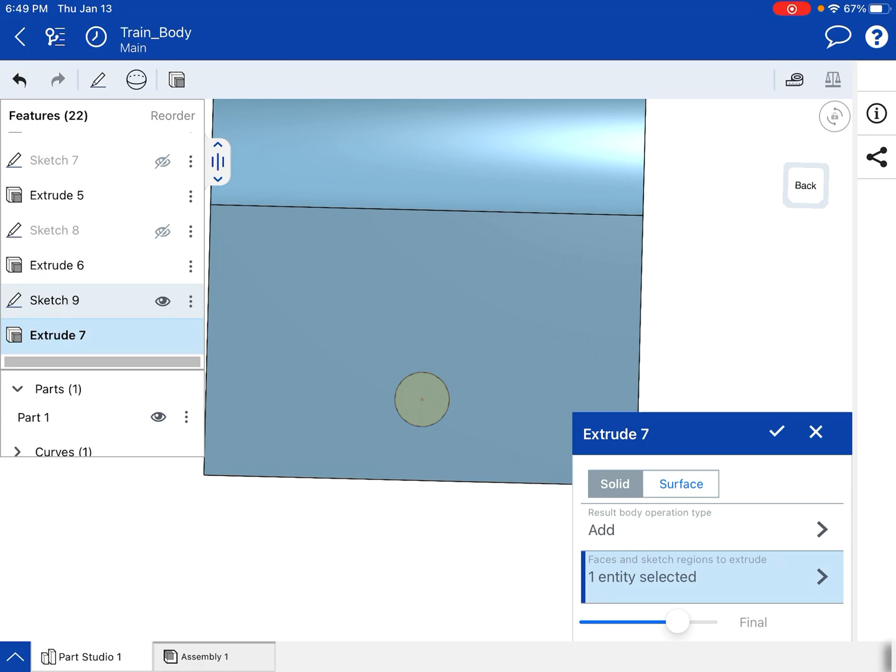We're going to finish our sketch and extrude. Select that circle that we just created. We want to remove, and we are removing a distance of 0.5. I'm going to go back to my isometric view, and we are all done.

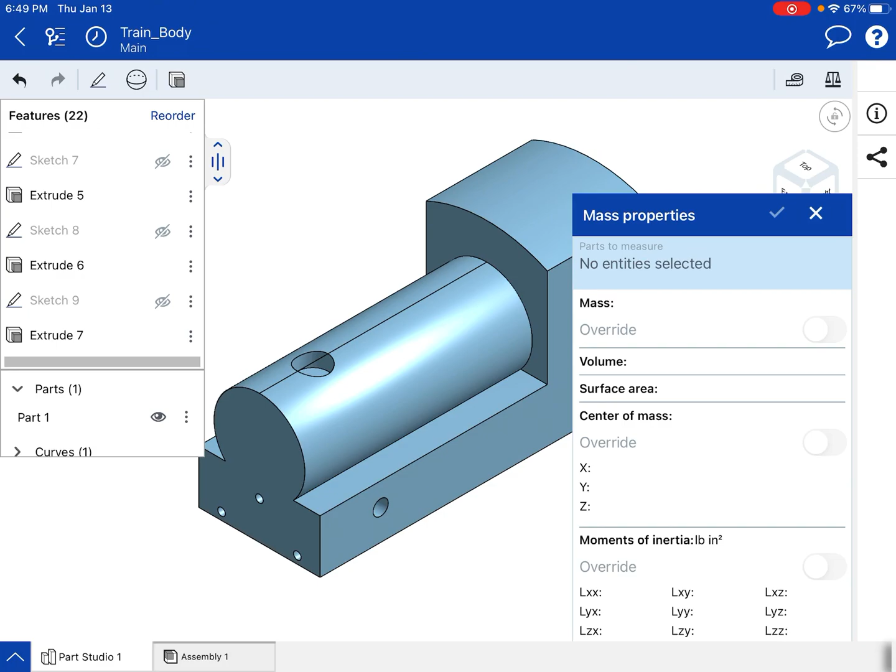So to check that we did everything correctly, I'm going to go up top. There's a little scale, and it's talking about our mass properties, just like iProperties in Inventor. I choose that mass scale, and then hit part 1 on my side over here. And we have a dimension of...

20.225. This is the first time I've modeled this inside of OnShape, so it may be possible that we have a different dimension than what we would have in Inventor, and that's okay. Different 3D modeling softwares are going to create hole features differently than we would otherwise.